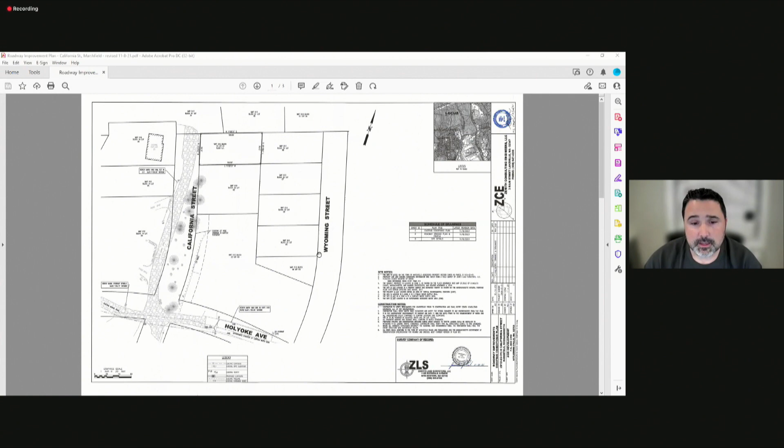I believe this parcel to be town-owned, and these parcels up in here also to be owned by the town. And I believe there's a dwelling here with a drainage easement of some type and buffer in this area here, which we have zero plans on touching, because I believe it's restricted not to be touched. If I may, I'll proceed with the proposed plan.

So as part of our proposed layout plan, we're looking to improve California Street within the right of way. So you can see the existing roadway construction and where we're actually placing the roadway now. We're also doing some improvements to the intersection because of some discussions with the town and the applicant. So the roadway out here would be 20 feet wide with berm on each side, and up in this vicinity would be 18 feet wide with 1 foot berms on each side as well.

At the end of the road on the easterly side, we're proposing a 3-bedroom dwelling that will have municipal water and on-site septic. We've already been through the Board of Health, received perks and approval on the septic system design. As part of our design plan, we also submitted a drainage report that was reviewed by the peer engineer for the town, Amory Engineering, who is online tonight as well. They did have some comments in a review letter, none of which I disagree with. I think Mr. Brennan's a fantastic engineer and I respect every one of his comments.

In this layout in particular, we have a couple of catch basins to catch the runoff from the construction in the area, and we're looking to do infiltration via leaching pits with crushed stone wrapped around them. Over the top of it, we're creating a depression to actually be able to hold some of that water as well. And we have a catch basin grate in the top so that water, if it's collected in that area, can also get in or surcharge into that area if need be.

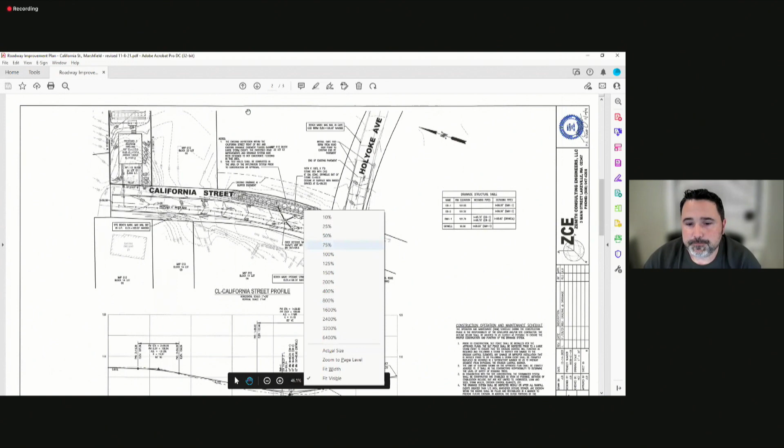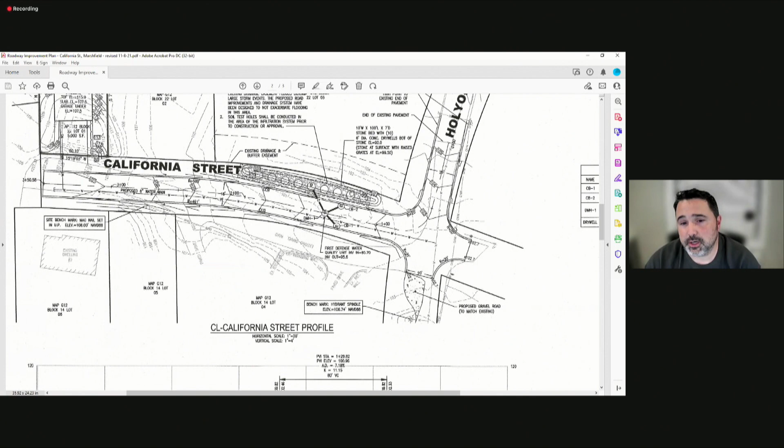You can see roughly 3.75% with a small low point in here, a curve, and then 3.4% catching into existing grade. So very gentle slopes on the asphalt itself. And again, what that does is we're creating a low point here for the catch basins so that they can collect the stormwater and discharge it into this area.

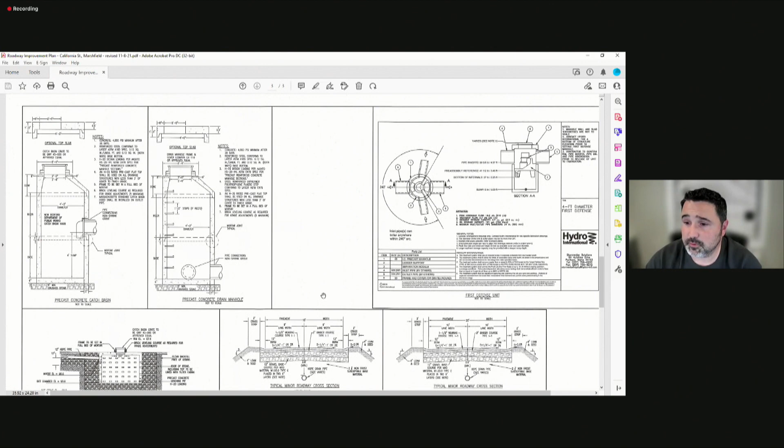On sheet 3 of this set, we have our construction details. I'm not sure if anyone has any questions on them, but I'd be happy to review them or go over them. I know that Amory also took a look through this and had a couple of comments or suggestions, all of which I've read through and I have no problem with. So at this time, unless there's any specific questions, I'm happy to answer or address any additional items that you may have.

Okay. Let's see here. I don't have any particular questions right now. Do any other members of the board before I go to Pat and Greg? No. Okay. Since you've mentioned Pat Brennan and Amory several times, I think that maybe I'll go to Pat first, and then Greg will get your thoughts as well. Sure.

Great, thank you. Pat Brennan with Amory Engineers. I reviewed the project, submitted a letter to the board dated November 10th with basically 13 comments. I'll just run through them very quickly. As Jamie mentioned, HydroCAD calculations show that the proposed drainage system will adequately mitigate all of the storms up to and including the 100-year storm, and that's required.

They haven't done any test holes up there, so they have a note on the sheet that says that it'll be conducted in the area of the infiltration system prior to construction. I'm pretty familiar with the soils up in this area. They're generally fairly sandy. It's a deep water table, so I'm really not worried about it. So I think that would be acceptable. And if the board were to approve the project, I'd probably just make it a condition of approval.

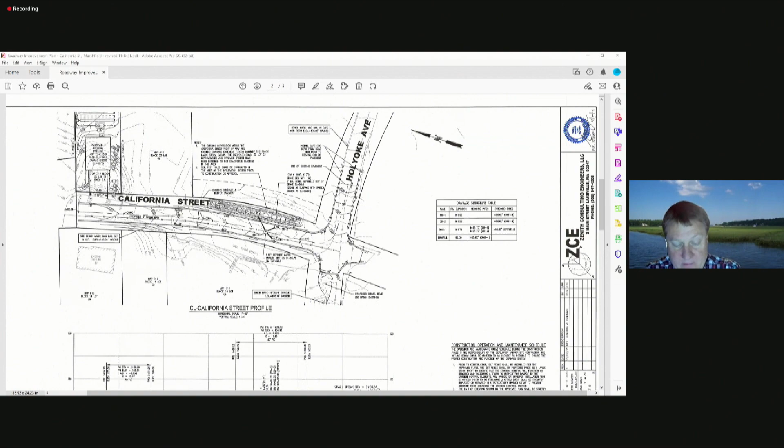Jamie just said that they already have Board of Health approval for the septic, so my next comment was in relation to that. My next comment just had a number of things that are required on the street improvement plans that they need to add to the plan. I won't run through them all, but there's a few that they need to add. I had a comment about where the placement of the binder course should be in the construction sequence of operations that's shown in the drawings.

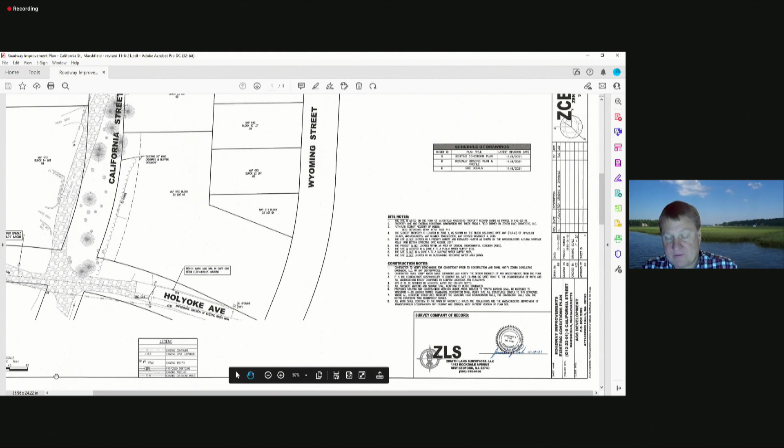And then note 4 on sheet 1 should reference the current FIRM, which is the FEMA flood map, which is July 6th this year. I think it references the 2016 map. So not that there's flood zone in this area anyway, but just to be consistent. So that was it. I'd be happy to answer any questions if anybody has anything. Do any other board members have questions at this time?

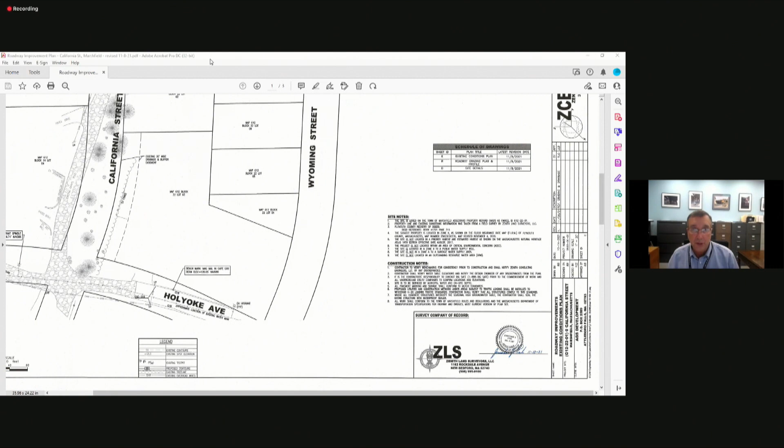Thanks, Pat. Katie, I did have a resident come in and ask about either boulders or a guardrail at the end of California Street to block access to the town property. So if you slide right in that area, as some of you may know, we've been having a lot of problems with the town-owned land, protecting it right up there adjacent, and they felt by paving the road right to that spot, it's basically saying, come on, drive in. So they would like some type of boulders or something there to block that.

It sounds like there's 9 comments on Pat's stuff that would need changes to the plans. So I was thinking instead of having them revise the plans, we go with writing them as conditions to approval if that's what the board would like to do, and then require as an additional condition an as-built plan for this. And the reason I'm saying it that way is because they haven't done those test holes yet. When they do the test holes, things may change anyway. Pat, does that sound logical? Yeah, I mean, I don't think anything's going to change, but yeah, okay. I think that's reasonable. All right.

So DPW did send some last minute comments. Pat mentioned 2 of them. They do require the reinforced concrete pipe for the drainage. That was their 3rd comment. Their 4th comment was, and I haven't been up in this area recently, they asked for some type of bollard on Holyoke to help redirect traffic, and I thought they weren't really changing the traffic pattern on Holyoke. I thought they were changing the traffic pattern on California. But Rod had sent the comment, which I did send to Jamie and to Elliot and to Pat. But I got this at 6:16 tonight.

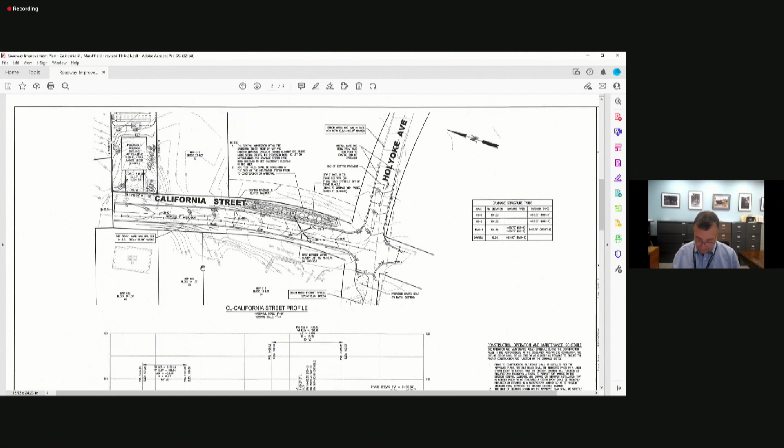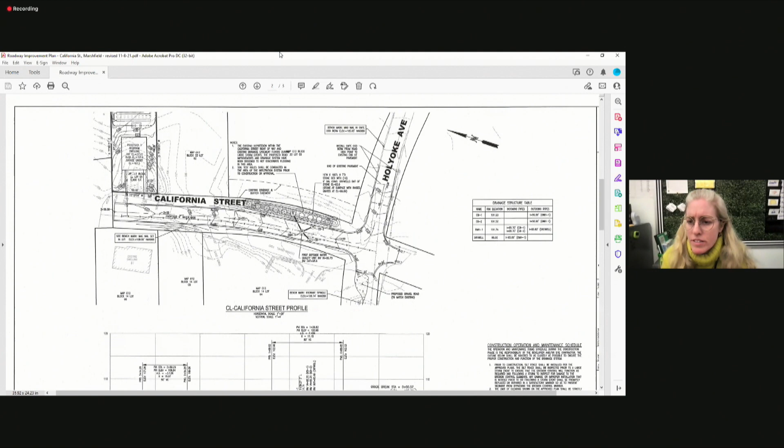Okay, I guess actually here, and I'll open it. Do we have any abutters or any members of the public who have questions or concerns? Jamie, could you stop sharing for a minute so I could see all the screens? All right, I don't see any hands up. I don't see anything in chat. Okay.

So Greg, I totally agree with DPW about putting boulders at the end of the street there to try to block that. And is that something that the applicant would be able to do along with this work? I don't think we'd have a problem with that. Okay. So I would think we could add that to the conditions. Yep. And any other members of the board have questions?

Yeah, just clarifying one thing. So Holyoke is 20 foot plus 1 foot berms on either side, and then California is 18 plus 1 foot on either side. Is that right? That is correct. The areas that we're improving, those are the dimensions. Okay, thanks. Any other questions?

Okay. With that, I would make a motion that we approve the street improvements with the conditions as discussed, as suggested by Pat Brennan and DPW, and requiring an as-built. Anything else I should add to that? And the boulders. And the boulders, yeah. So Katie, you might want to close the public hearing first and then go back to the motion.

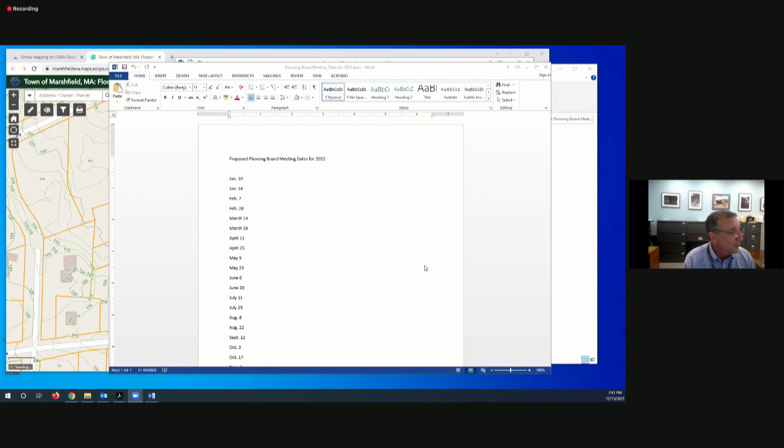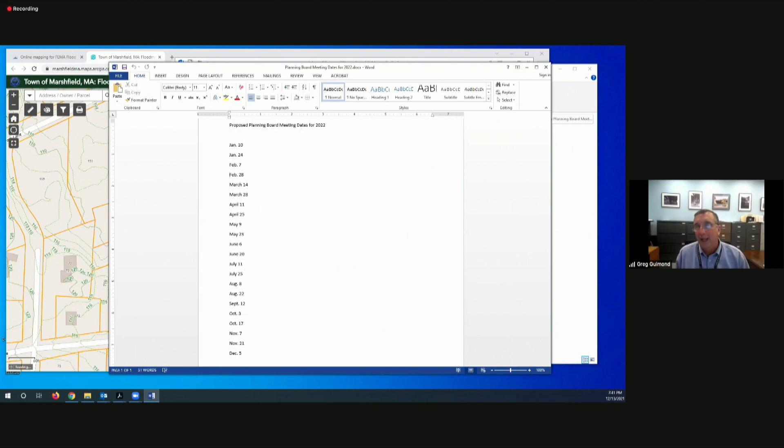Yeah. January 10th, January 24th, February 7th, 28th, 14th and 28th of March, 11th, 25th of April, 9th, 23rd of May, June 6th. I don't like that day. June 20th, July 11th, July 25th, August 8th, and 22nd. Here we go. September 12th, October 3rd, October 17th, which will probably conflict with town meeting, November 7th, November 21st, December 5th. I don't have an issue with any of those. Yeah, do we need to vote this? Yeah, that's what we set up for the dates for applications and stuff.

Okay, I'll make a motion that we approve the proposed planning board meeting dates for 2022. Do I have a second? I'll second the motion. Fred Monaco. All right, roll call vote. Fred Monaco, aye. Nick Papastratis, aye. Kevin Cantwell, Katie O'Donnell, aye.

All right, any other board and staff updates? We filled in the paperwork to finish off the grant on the flashing pedestrian lights for the bridle path for the 3 locations. We were very fortunate. We had some support from CPC. We were a few $1,000s short, and CPC assisted us. And that wrapped up that. We got that all done. We had a deadline of December, and we had it in place prior to December.

Very nice. Karen, do you have anything you want to add? No. Apparently a few things walked in while I was away, but you guys will find out about them soon enough. We're working on them. Yeah, several concept plans. Oh, boy. Sounds good. All right.

Do we have any requests for advice? We do. We have a ZBA meeting tomorrow night. Our timing is right this time around. Karen's looked at them, and the only one that we have a question on is whether or not you guys want to comment on Bud's second wall sign. So the marijuana shop that used to be at the Buckles and Boards place would like a second wall sign so you can see it when you're coming in from Pembroke on 139 sooner than when you're passing the building. So their current sign is on the front of the building, and they want to put one on their side.